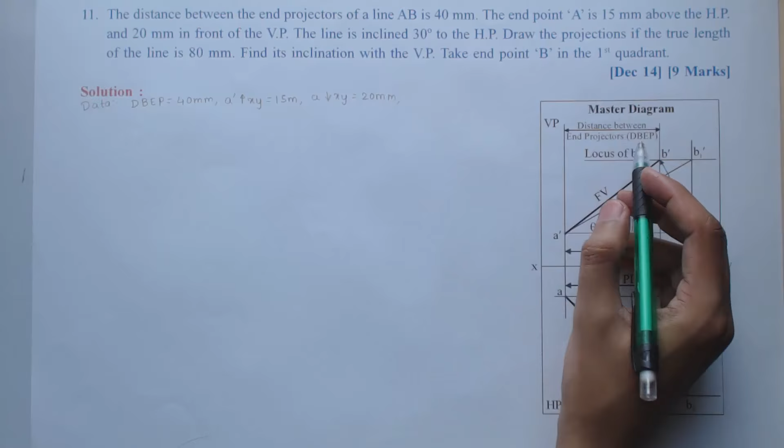The line is inclined at 30 degree to the HP, which is nothing but the true inclination of true length in front view, which is angle made by A dash B1 dash, which is theta from the master diagram. So we have theta, which is 30 degree. Draw the projection if the true length of the line is 80 mm. So again from the master diagram, the notations for true length are A dash B1 dash and A B2. So I can write A dash B1 dash is equal to A B2 is equal to 80 mm.

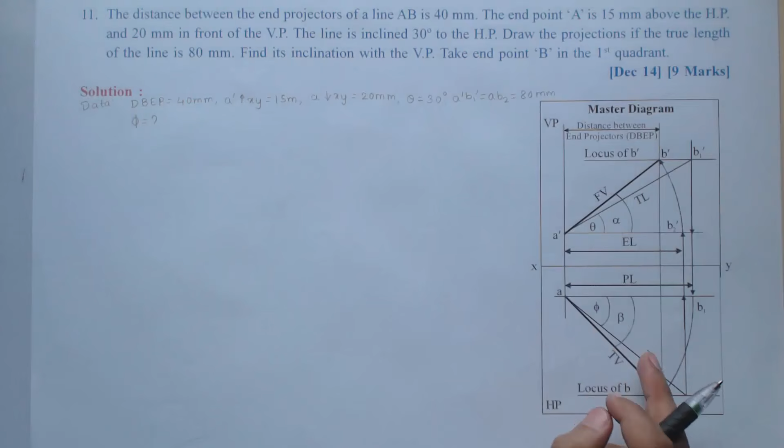Find its inclination with the VP. So we have asked angle phi, inclination with the VP, that is the true inclination of a true length, which is AB2 in top view. Take end point B in the first quadrant. So I can write B dash above XY, but we don't know the distance, and B below XY. So again the entire line is lying in the first quadrant, so my solution will be similar to the master diagram.

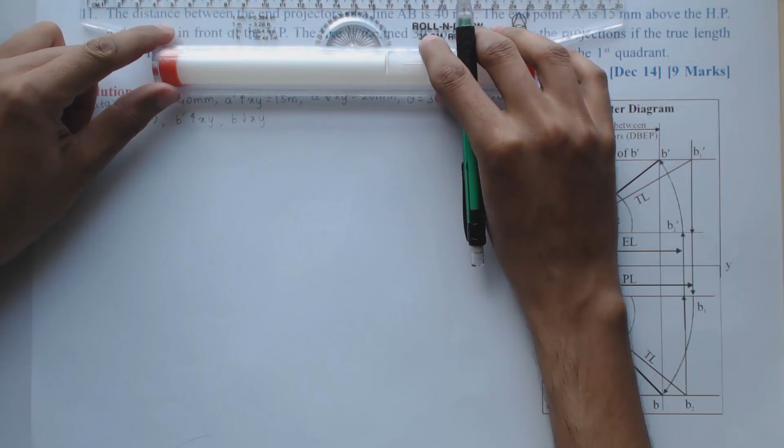So we need to start somewhere in the middle. So starting with the reference line XY, okay. First I can start with the location of A and A dash. So for that we need to drop a perpendicular to XY line, which is the projector for A and A dash. So it is given A dash is 15 mm above XY. So I'll mark point A dash first, 15 mm above XY, and 20 mm below XY. So I'll mark 20 mm below XY. So A dash and A.

Okay. Then this data is used. Then we know theta and true length. So theta is the angle made by A dash B1 dash, which is 30 degree, and also the true length is given, which is 80 mm. So we can start with marking the true length at an angle 30 degree. So for that I'll first draw the horizontal lines passing through A and A dash. So now I can measure the angle of 30 degree starting from A dash. Again we have to measure it in upward direction because B is also lying in the first quadrant.

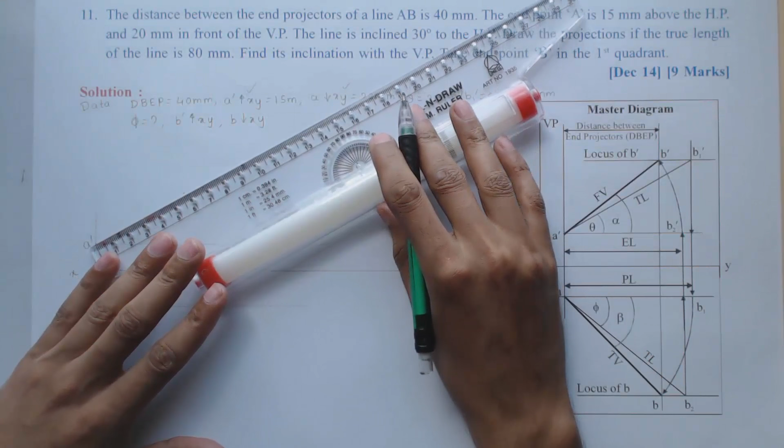So I'll measure the angle 30 degree, and on this 30 degree line I need to measure the true length, which is equal to 80 mm. So with A dash, now I have to mark point B1 dash, which is 80 mm. Okay. So on this theta equal to 30 degree line, we have located the true length, which is B1 dash. So again, after marking the true length, I can draw locus of B dash passing through B1 dash.

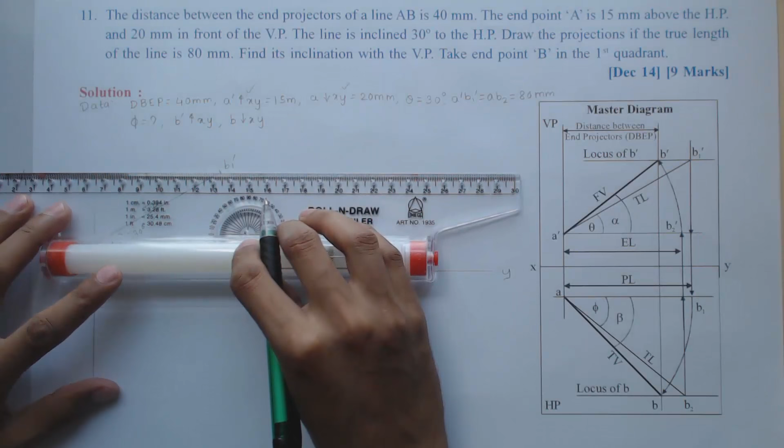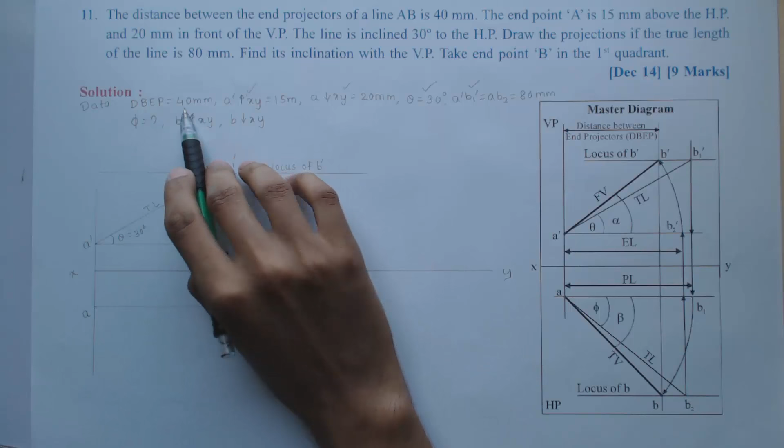Okay. So this line gave me locus of B dash. So we have used this as well as A dash B1 dash. Now we can't mark AB2, which is the true length, in top view because we don't know the angle phi. Okay. So next data available is DBEP, distance between the end projectors.

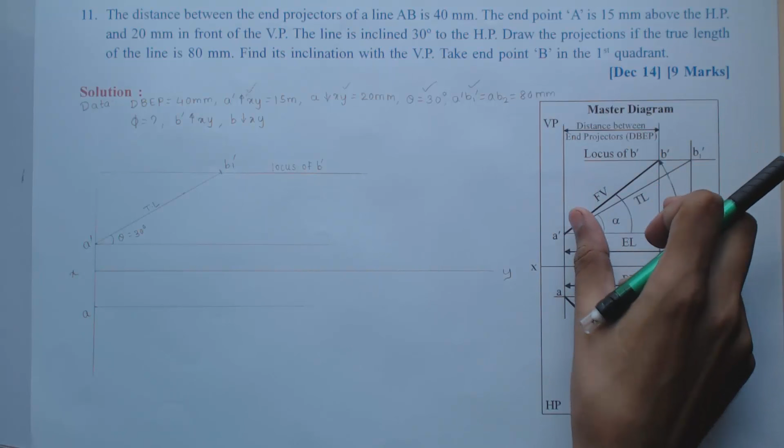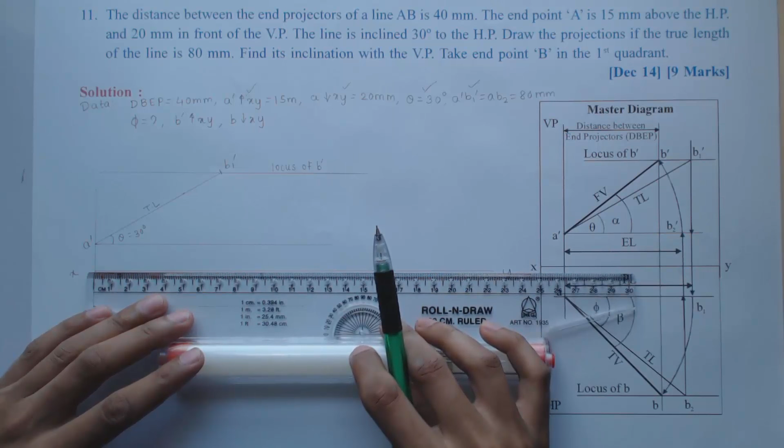So we know distance between these two lines, that means the line on which B dash and B is lying from A dash and A is 40 mm. We have already marked locus of B dash. So if I measure distance equal to 40 mm on XY, which is the DBEP distance, so now at this 40 mm I can draw a parallel line to a vertical projector passing through A dash.

So it is one of the end projector for point A, so we can locate another end projector for point B, which is giving me BB dash. So on this line only we are going to get B dash and B. So this distance we have already marked, which is 40 mm. So I can write DBEP is 40 mm. Okay. So obviously where this line cuts the locus of B dash, I am going to get point B dash.

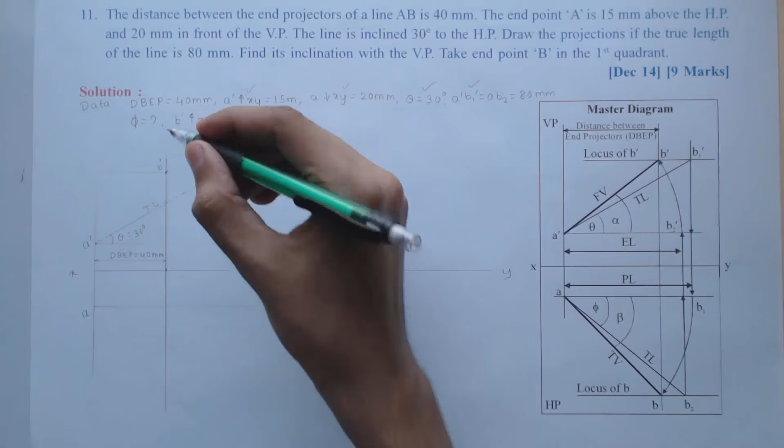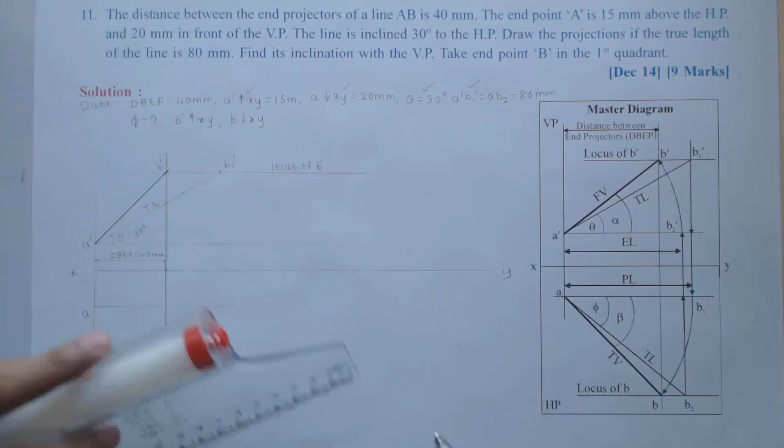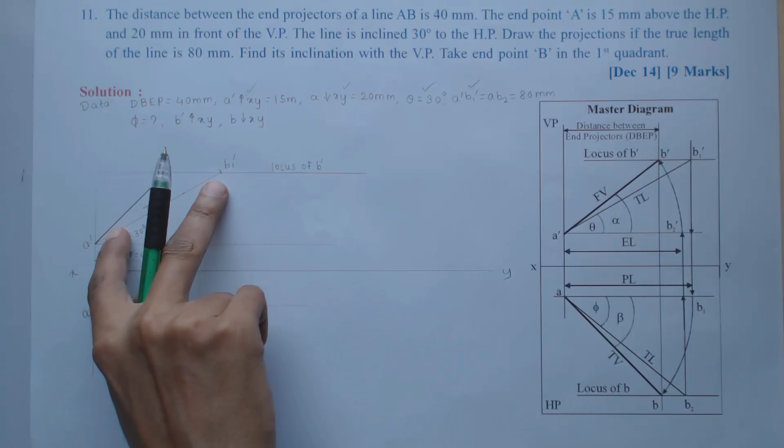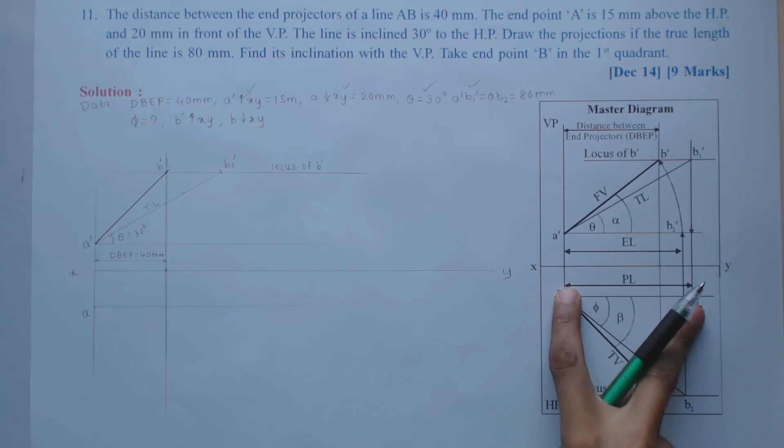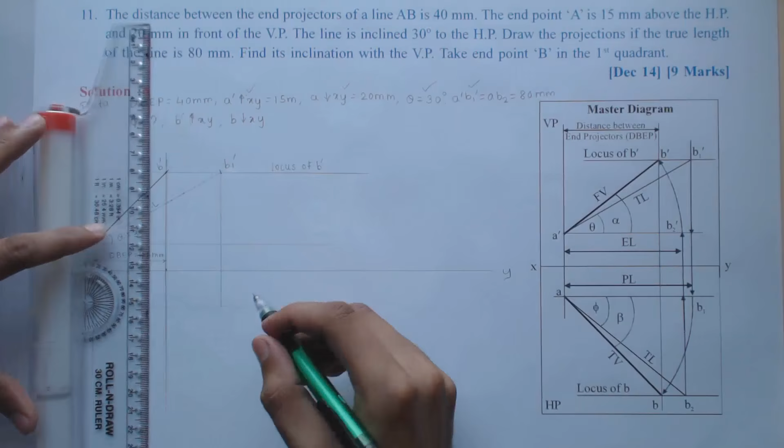So first I'll mark the vertical projector passing through B1 dash up to horizontal line passing through A. So this will give me the corresponding top view of point B1 dash, which is B1, and this length AB1 is nothing but the plan length. Okay. Now we know plan length AB1 is equal to

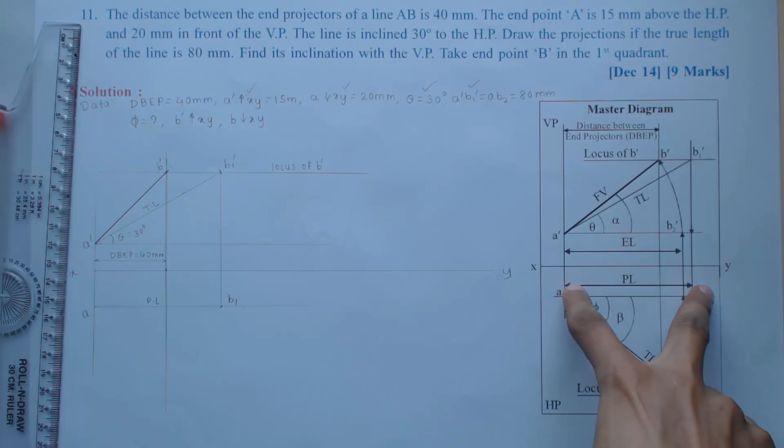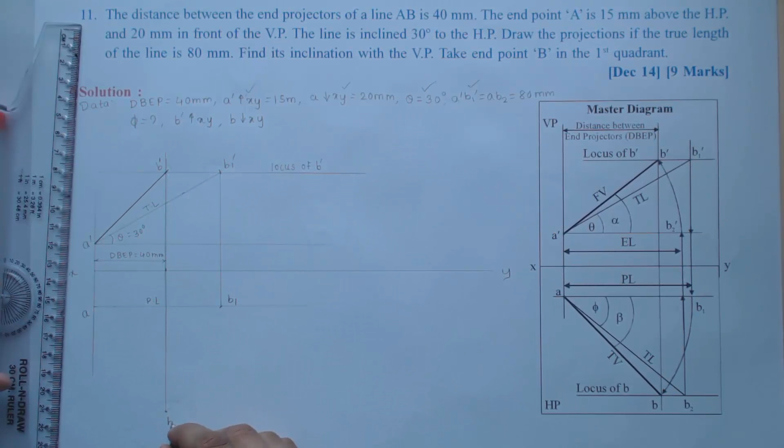top view AB. And we also know that on this vertical projector B dash and B both are lying, so if I produce an arc with the plan length AB1, the intersection of this arc with this vertical projector will give me point B, which is the required top view. So I'll just produce this plan length, okay, and where the arc is cutting that vertical projector for B dash and B, here we are going to get point B, which is the top view of point B.

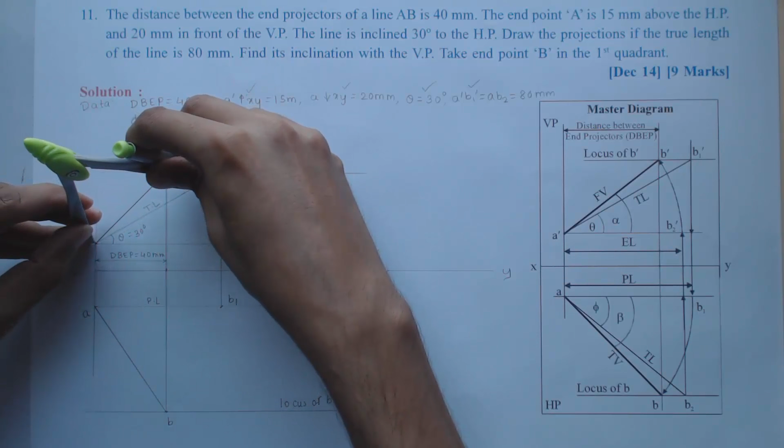So now we can locate locus of B. So horizontal line passing through B will give me locus of B, and joining AB will give me the actual top view AB. Now the only remaining part is marking the true length in top view, which is AB2. We know the true length is 80 mm, which we have already marked in front view A dash B1 dash. So same length I can mark in top view.

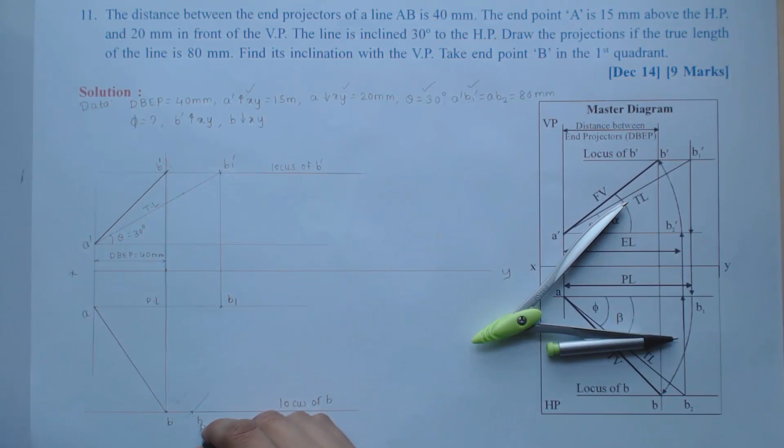Now we are sure that B2 is going to lie on the locus of B, which we have already marked. So I'll cut the arc of true length. So this will give me point B2. So now we have marked true length in top view also. Okay. Now here we are asked to calculate angle phi, which is the angle made by AB2, that is the true length in top view. So we need to measure this angle, which is phi.

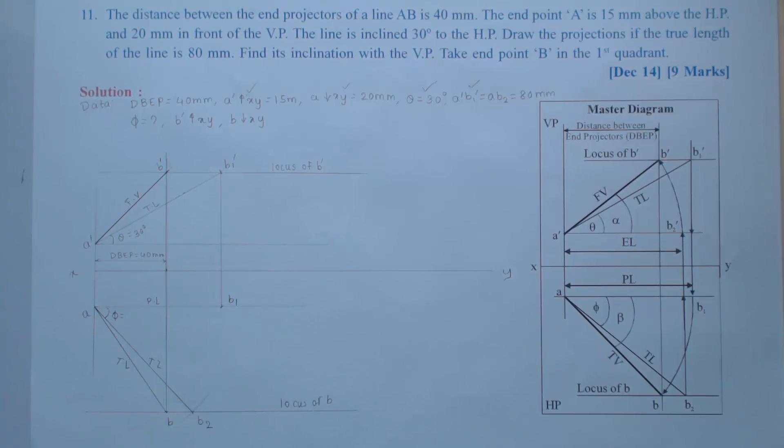Okay. So before that, I'll write the notation. This is front view, A dash B dash, AB is top view, then AB2 is again true length, theta we have marked, this angle is alpha, this angle is beta. No need to calculate these angles because not asked. So I'll just measure the angle phi, which is asked.

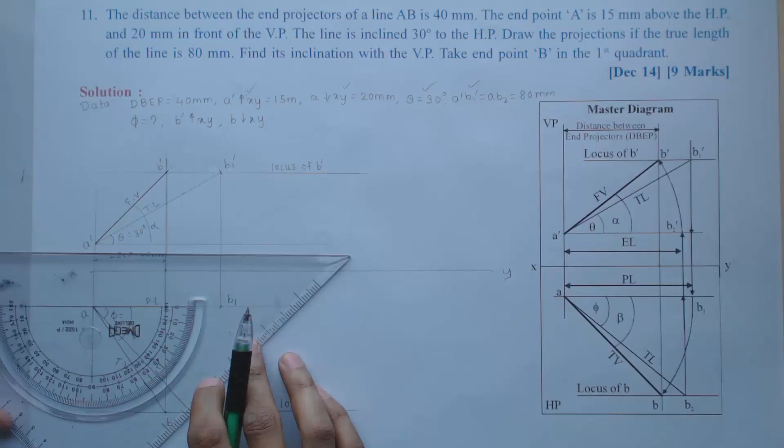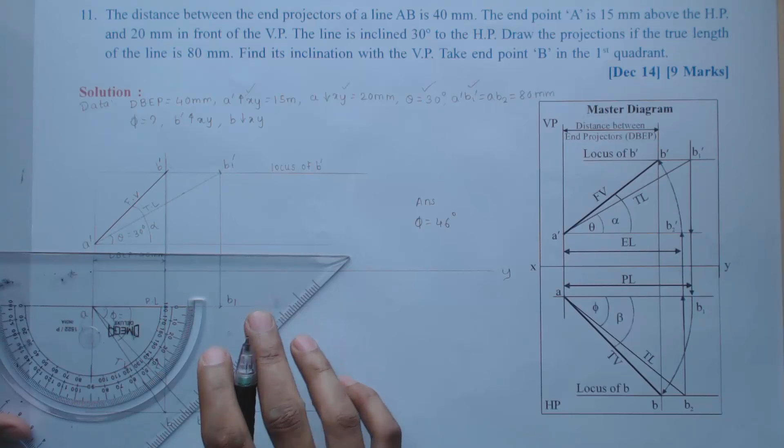So it is almost 46 degrees. So I can write the answer here. Phi is equal to 46 degrees. Again, plus minus 1 degree is acceptable. So your answer can be within 45 to 47. Right. So plus minus 1 degree is acceptable. So this completes the solution for this particular problem.